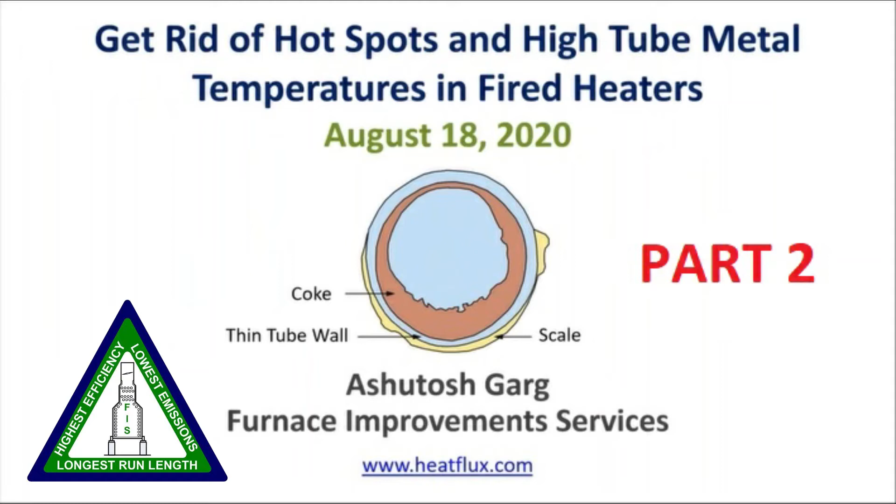Let us look at the coke. Metals have thermal conductivity anywhere between 200 to 300 BTUs per inch. Coke, depending on whether it is fluffy or hard dense coke, has thermal conductivity that can vary between 1 to 30. We typically use 15 in refinery applications. So coke has 10 times lower thermal conductivity, or 10 times the insulation value. If the metal temperature rises 25 degrees, the temperature rise across the same thickness of coke will be 10 times, or 250 degrees. The thumb rule is 1/8 of an inch of coke adds up to 100 degrees of tube metal temperature rise.

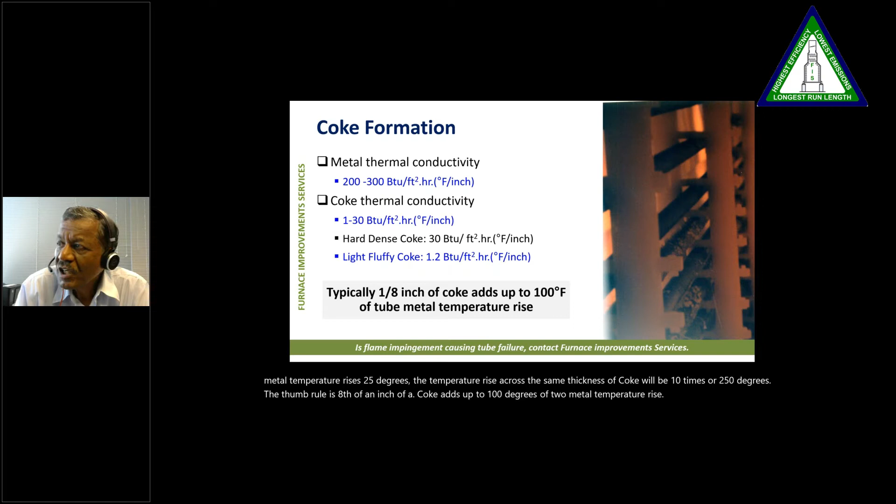This is a picture of a coker heater, and if you look closely, you can see the scales on the tubes. That's how bad the situation was. This is the double-fired heater.

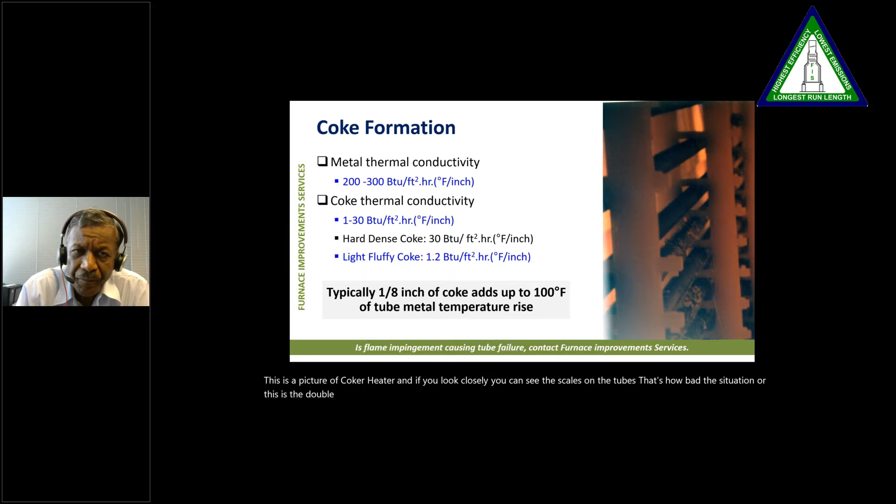I don't have to tell you what happens when coking starts, but coking of tubes will lead to several problems in fired heaters. Tube metal temperature starts going up. Fluid side pressure drop also starts increasing. Firebox temperature goes up. To maintain the same heat transfer, the firing rate goes up, the efficiency comes down, and ultimately the charge rate starts limiting. Finally, you have to shut down the heater and either decoke it or pig it to clean the tube and then start all over again. That's a very expensive shutdown if you have to do it.

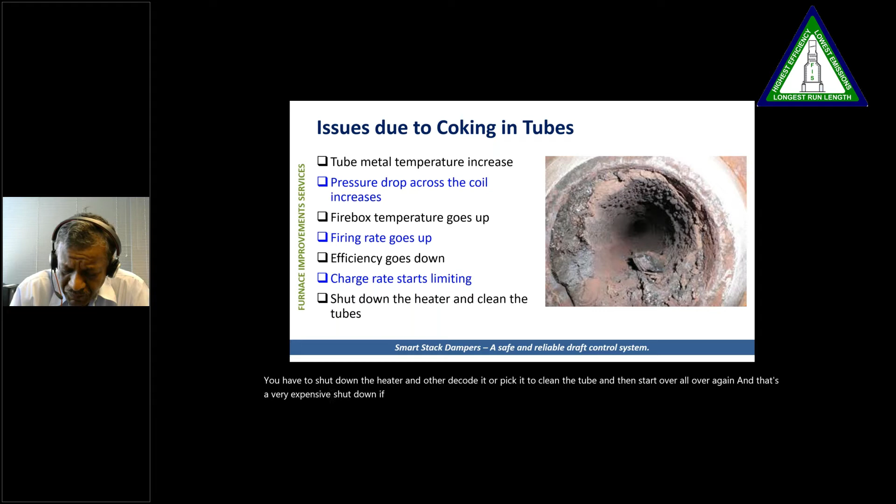So here we are showing you a radiant tube metal temperature profile. Even though the model we use for our calculations is based on a continuous stirred tank reactor, meaning the flue gas temperature across the whole heater is uniform, there is only one temperature, that does not happen actually in real life. You can see in the case of a vertical cylindrical heater these hotspots, and the temperature is almost like 1130, 1150 degrees.

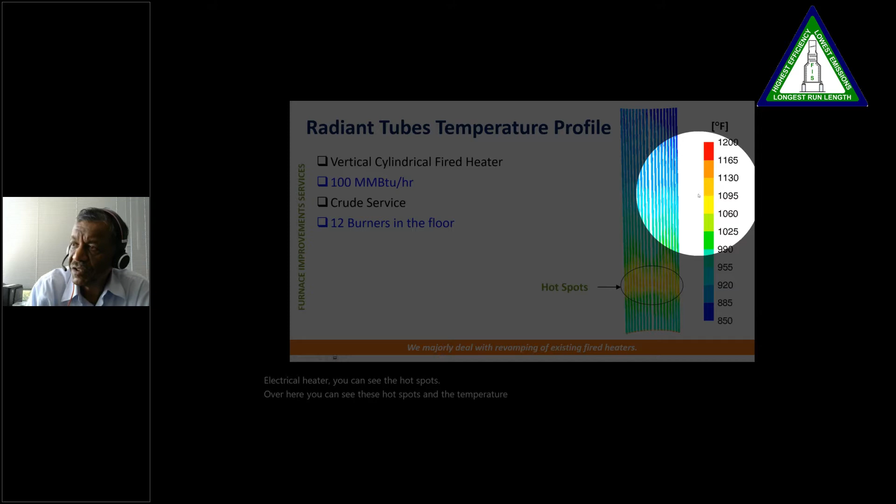Similarly, this is another depiction of radiant heat flux in a vertical cylindrical heater. We are trying for uniform heat transfer and uniform heat flux in all the radiant section, but the reality is much different. The presence of ultra low NOx burners and long flames have created zones of high and low temperatures. The industry has also moved to long, narrow boxes to save money, and that creates a temperature gradient in the firebox, giving us a very different flux profile.

Our experience is that flames remain straight for only 10 to 15 feet. They are just a gas jet, and afterward they start losing shape. The flames are drifted towards the tubes, causing high tube metal temperatures. In this slide, you will see the flux variation in the whole length of the tube. The top 1/3 is only 7,000, the middle 1/3 is 15,000, and the bottom 1/3 is 22,000, almost 3 times what is happening on the top, and the average is around 13,500. So you could see how much flux variation we can have, and the maximum heat flux goes almost to 37,000. This will definitely lead to coking and high tube metal temperatures in fired heaters.

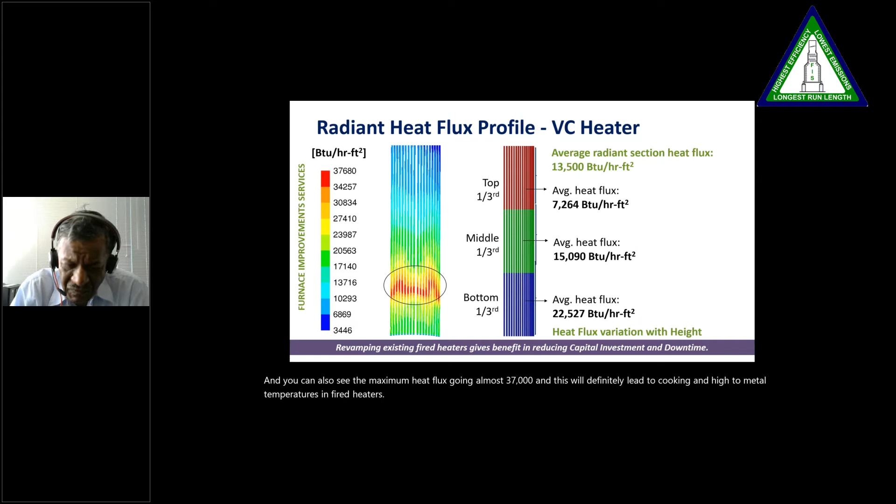So I did some research, and I looked at API 560, I looked at API 535, and I looked at what type of solutions are available if you have high tube metal temperatures. And I found that there is no permanent solution available. They all talk about changing the burner tip, checking the burner tip angle, checking the burner tip location, or if your tip is plugged, poor mixing of fuel and air, flue gas recirculation pattern. So I could not find any real fix to solve the high tube metal temperatures in fired heaters.

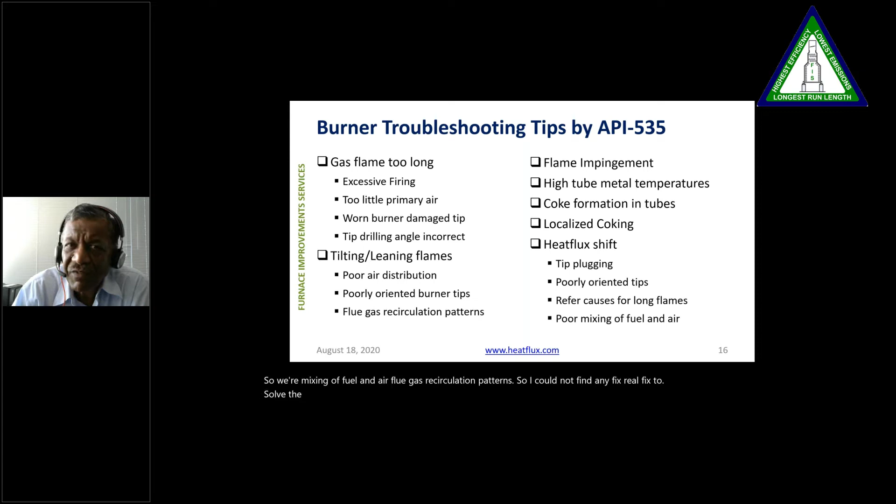So these are all temporary fixes, and our experience is once you start having high tube metal temperatures, it is not a question of if, but when. It's not a question of what needs to be done, but when will you have a shutdown, and how long can you avoid it.

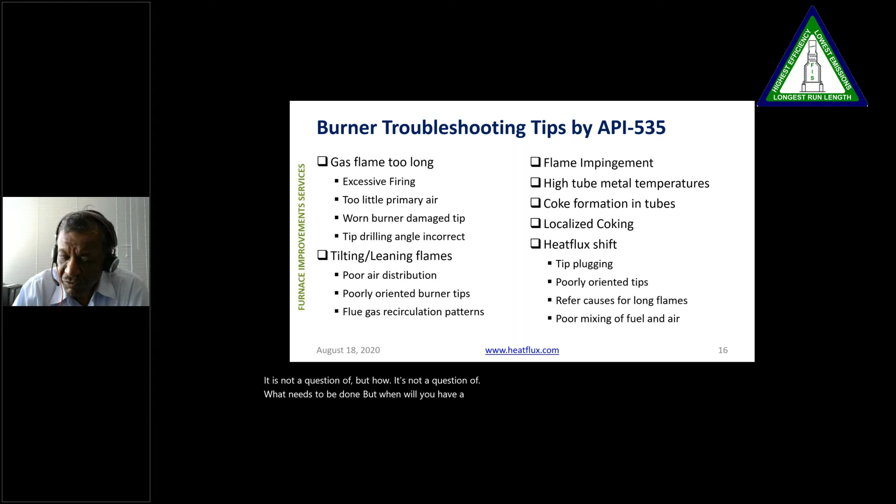So our technology is very, very simple. The basic premise is high tube metal temperature is the biggest problem in fired heaters. And most of the high tube metal temperature is due to localized flame impingement. Hot flue gases in the vicinity of tubes cause high tube metal temperature. Historically, fired heaters have been fired vertically upright, sideways, downwards. Our technology installs the burner at a slight angle and reorients the burner flame away from the tube.

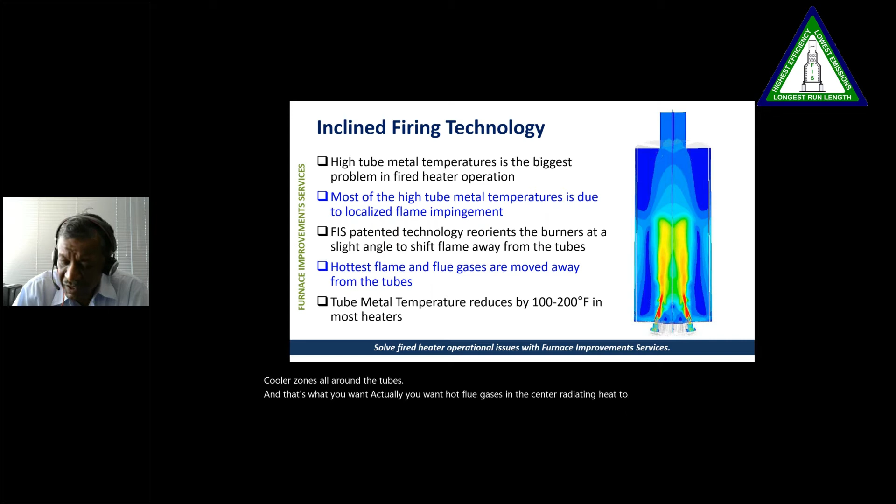It is based on a very simple concept, moving the flames away from the tubes. When you talk of radiation heat transfer, the flames never come into the design or heat transfer calculation. So by moving the flames away, we are not affecting the overall heat transfer. In fact, we are moving towards uniform heat transfer. In this slide, you can see we have looked at the temperature profiles, and the flames are in the center with lot cooler zones all around the tubes. That's what you want actually: hot flue gases in the center radiating heat to the tubes and having uniform heat transfer.

So our technology is eminently suitable for existing heaters with ultra low NOx burners. We have seen that these heaters were originally designed with standard burners. When the standard burners were replaced with ultra low NOx burners, the heater started having hot spots and flame impingement. In most cases, the burner to tube clearance reduced, causing problems in operation. And it is not possible to enlarge the radiant section to keep flames of the burners away from the tube as much as possible. We have overcome this limitation without increasing the cost of the heater or changing its design, by putting these burners at a slight angle of about 5 to 7 degrees. Most of the time, you won't even notice it.

Flames of the ultra low NOx burners could be anywhere between 15 to 25 feet long, they could be even taller. So when we incline these burners, these flames start moving away from the tubes, and we increase the clearance between the burner edge, flame edge, and the tube almost like 1 foot for every 10 feet of flame length. If it's a 25-foot flame length, we have added another 2.5 feet clearance between the burner flame edge and the tube, and that's very, very important.

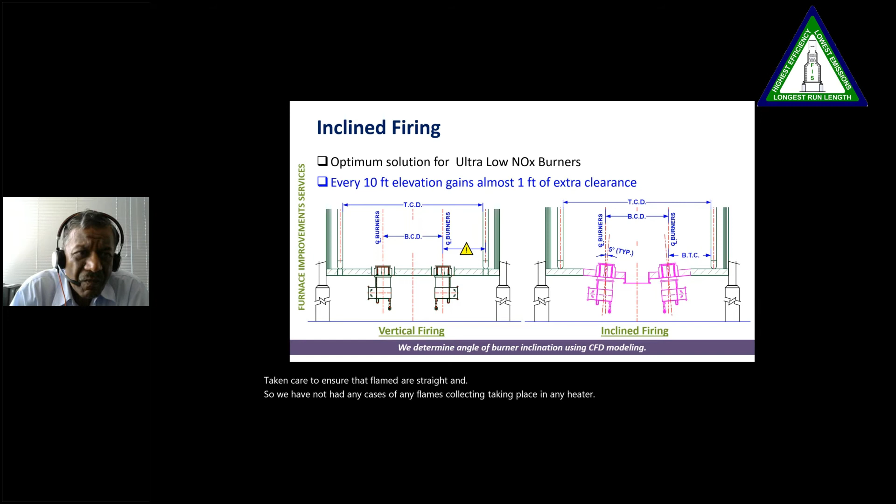I want to show you a burner to tube clearance on an 8-burner system. If you look at this chart table, you will see at 0 elevation, or at the floor, the burner to tube clearance is 6 foot 4 inches. But as we keep going up, and if the flame is 25 feet long, we have added another 3 feet clearance. So what we are basically trying to do is keep the flames away from the tubes, and it really helps. Also, the flames are not hot at the bottom. They are generally hottest at 1/3 or 2/3 height.

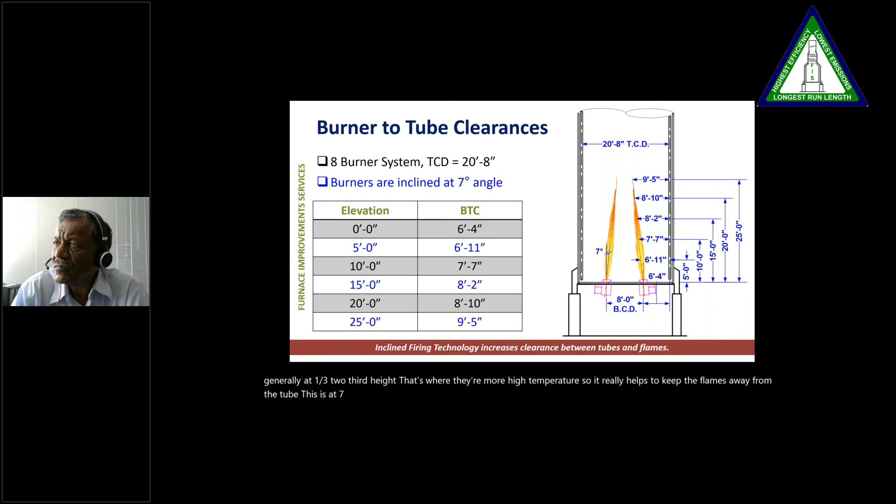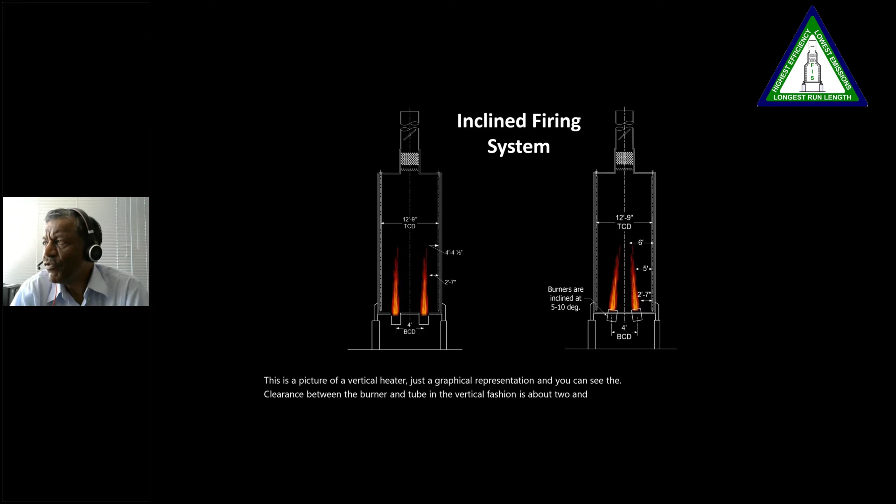So it really helps to keep the flames away from the tube. This is at a 7-degree angle. This is a picture of a vertical heater, just a graphical representation, and you can see the clearance between the burner and tube in the vertical fashion is about 2.5 feet, which we increase to 5 feet. So another 2 feet we are buying. That's basically what our technology does, just move the flame away. This is another one.

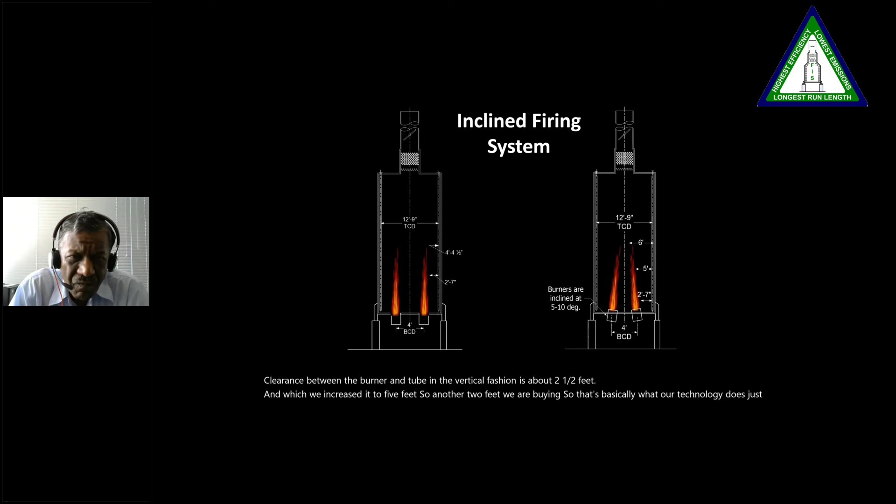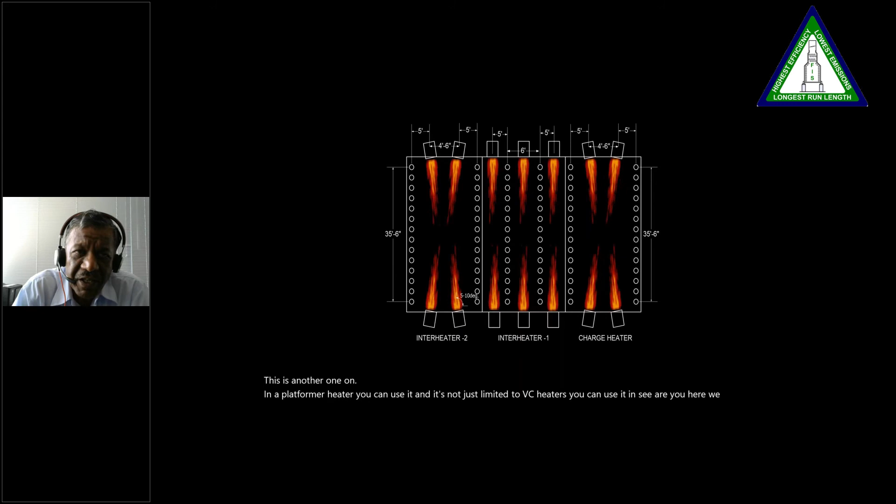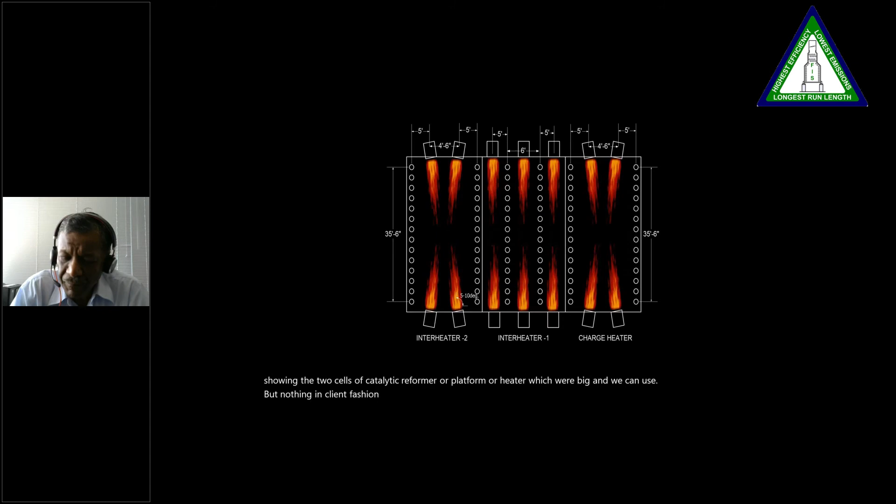In a platformer heater, you can use it, and it's not just limited to VC heaters, you can use it in CRU. Here we are showing the 2 cells of a catalytic reformer or platformer heater, which were big, and we can use burners in inclined fashion, firing towards the center and moving the flames away. Very simple concept.

Double-fired coker heaters have become very common in the industry. We find many are suffering from high tube metal temperatures from day one, caused by long burner flames and inadequate burner to tube clearance. We did a study for a client on their double-fired heater and found that the burner flames were almost touching the tube, or almost like 6 inches away.

We modeled the same burners at a 5 to 7-degree angle, and we were able to see a big difference in tube metal temperatures. The flames basically move away from the tube and start hugging the refractory. We increase the clearance by almost another 2 feet, and the TMTs come down by more than 100 degrees, which is a big number for a coker heater.

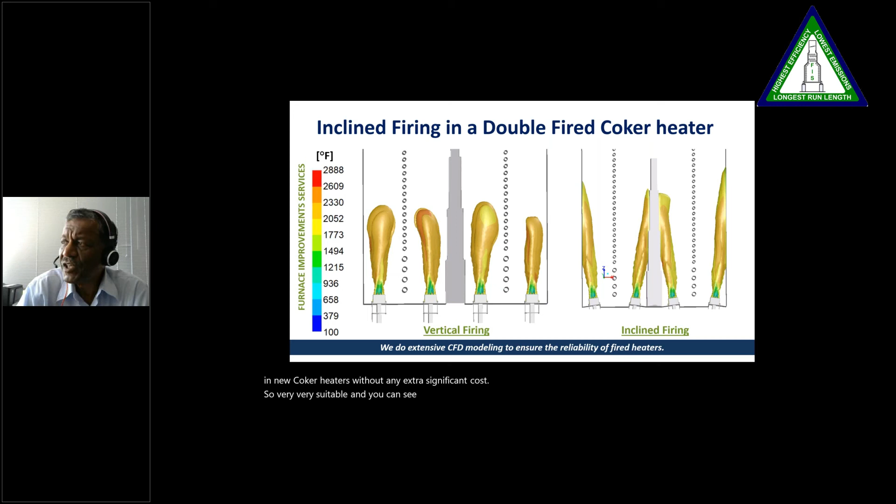This is an actual study we did for one of our clients. This is another heater we have done for horizontal tube, end wall fired heaters.

We don't build too many end wall fired heaters, but it's an old crude heater with end wall fired burners. The heater was experiencing high tube metal temperatures, and we did the CFD to show, and you can see yourself the color of the flames. Red is basically much concentrated in the center, and the tubes are experiencing a lot lower temperatures.

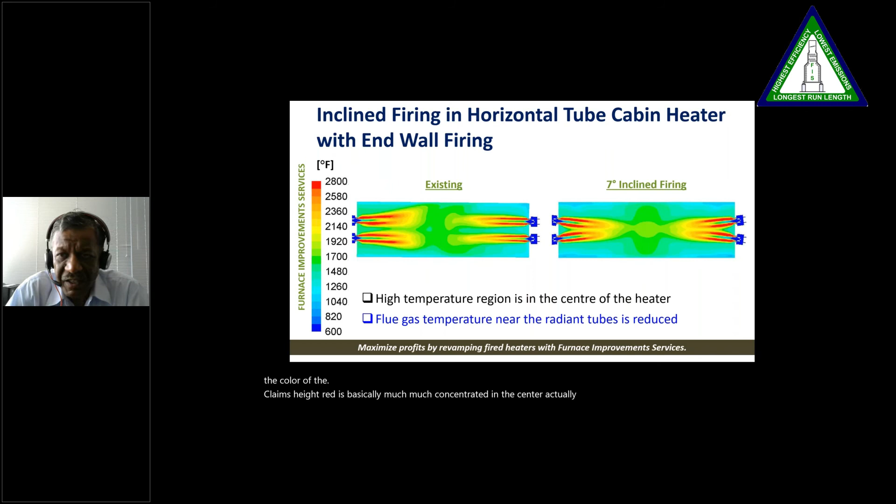We even did it in ethylene crackers. We did a modest CFD model of a furnace, and you can see the difference in vertical firing and inclined firing. In our model, the flue gas temperature is a lot lower, almost like 100 to 150 degrees lower, and the tube metal temperatures are also lower, and the flames are firing a lot more towards the wall.

So it can even be done in ethylene crackers if high tube metal temperatures are an issue. And I know ethylene crackers have a big issue with tube metal temperatures.

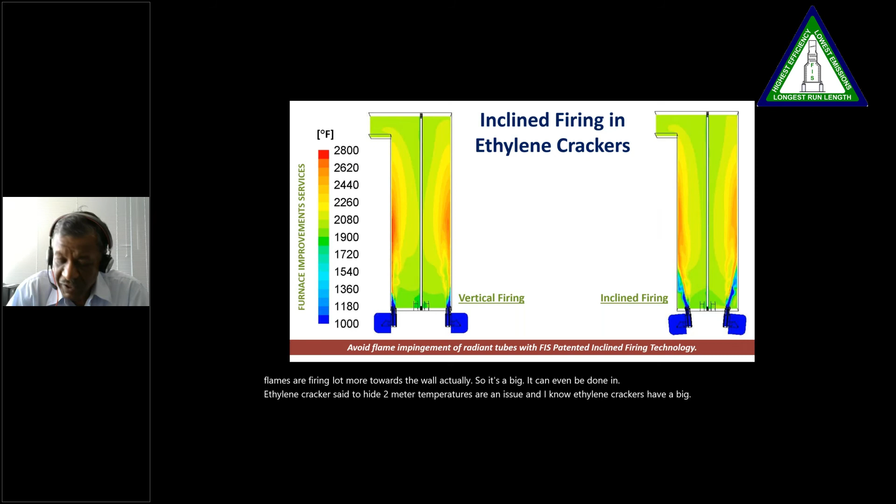So today we are going to be talking about a case study on a crude heater. This is a case which I first told you about when we started. We got a second chance to look at it in 2014.

The client had gone ahead and replaced the existing burners with new ultra-low NOx burners and air plenums in 2011. Now, even after doing that revamp, they were still having lots of issues in the crude heater. So they contacted us in 2014, and we did the study and later on the project.

This was a vertical cylindrical balanced draft heater with common air preheater system. The heater was originally built in 1976 and revamped in 2000 and again in 2011. The client was facing a number of problems, including capacity limitation due to high tube metal temperature. The situation was so bad that they had wrapped some of the radiant tubes in ceramic fiber blanket.

They were having flame impingement, and it was leading to soft coke deposition in radiant tubes. The client had other issues like combustion air maldistribution across burners, and could not get full capacity.

So we did an engineering study to improve the reliability of the existing crude heater, improve performance of the existing burners, mitigate flame impingement. They wanted us to restore the capacity of the heater. The heater was facing combustion air shortage during natural draft operation. So we looked at several ways of improving the heater reliability.

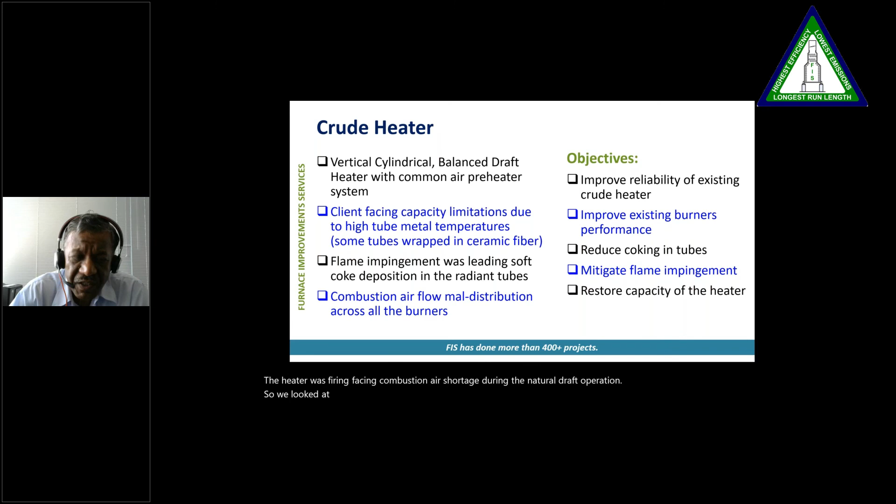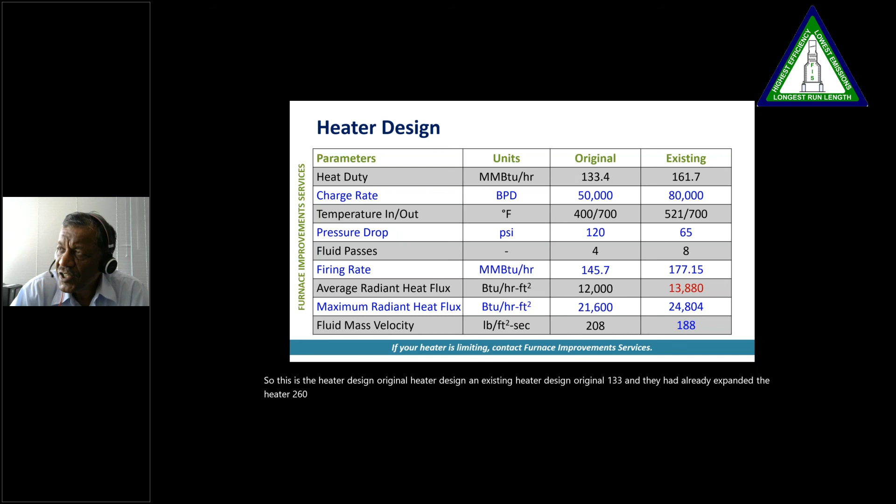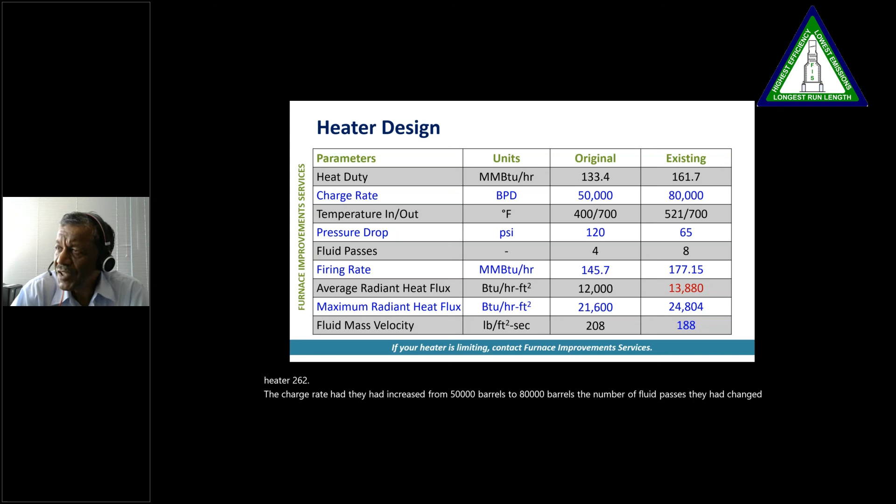So this is the heater design, original heater design and existing heater design. Original was 133 and they had already expanded the heater to 162. The charge rate they had increased from 50,000 barrels to 80,000 barrels. The number of fluid passes they had changed from 4 to 8. The flux had increased from 12,000 to almost like 14,000.

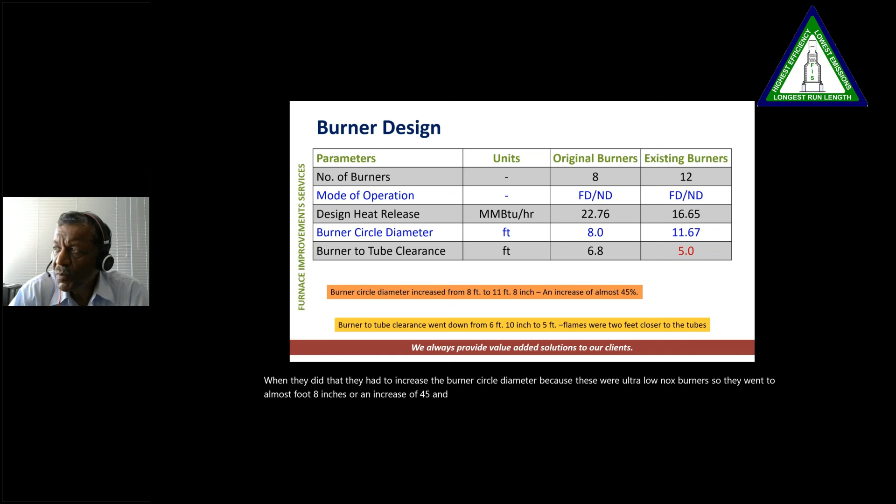What they did on the burner side was the original heater had 8 burners of 22 million BTUs each at 8 foot BCD, and they had changed to 12 burners, 16 million BTUs each. When they did that, they had to increase the burner circle diameter because these were ultra low NOx burners, so they went to almost like 11 foot 8 inches, an increase of 45%. As a result, the burner to tube clearance was lower by about 2 feet, and this was not even meeting API.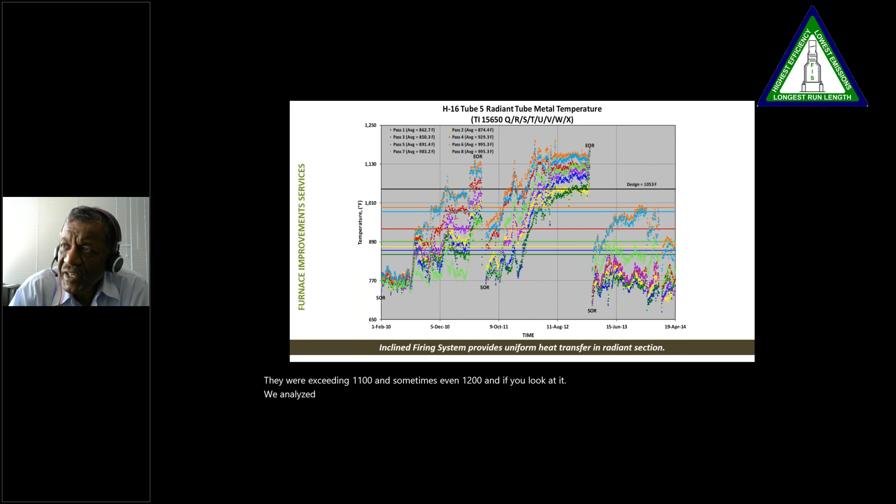We analyzed 4 years worth of operating data when they started. If you see over here, the temperature is close to about 800 at the start. And as you keep going up, it goes up to about 1100 degrees. Then they clean the heater, and it comes down to about 700 or 800 degrees. And then again, it goes up to 1100 degrees within a span of 1 year. Again, they clean it. So it was becoming a big problem for them.

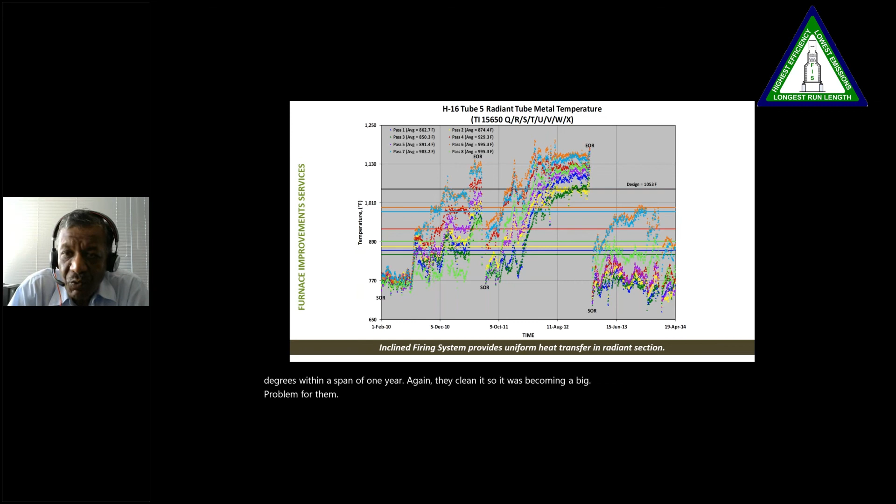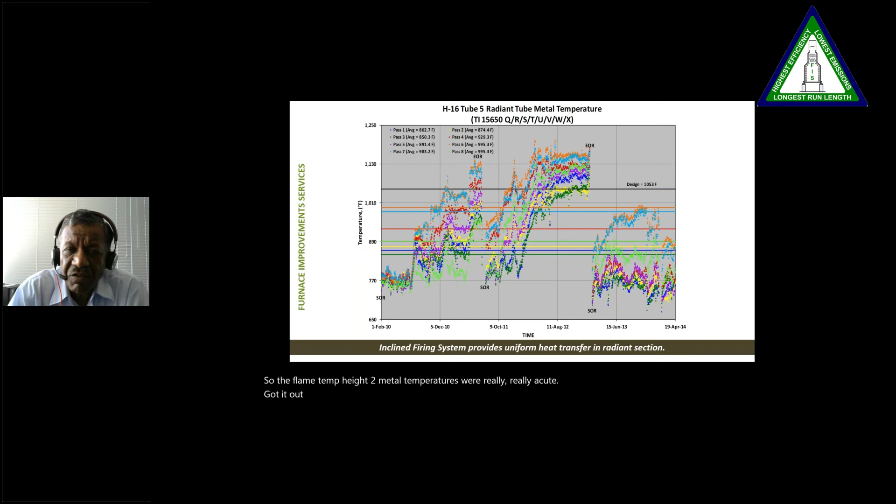You expect crude heaters to be running for at least 5 years. If you have to shut down the heater in 1 year, it's going to be causing a lot of profit loss. So the high tube metal temperatures were really, really acute. We carried out the CFD model of the existing burners and tried to understand what the problem is, and then we worked on the solutions.